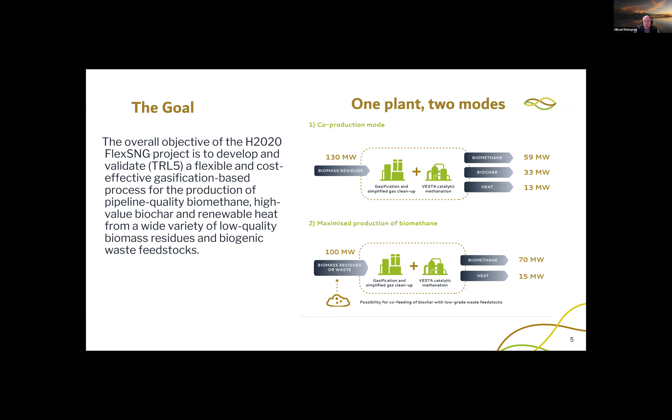There are 9 different work packages in the FlexSNG, and in other webinars they've been talking about other work packages. Today we will focus mainly on work package 2, which is optimization of the feedstock supply chain, and also on work package 8, the case studies and environmental analysis and business potential. And of course work package 9, which is part of this webinar for dissemination and communication.

There are a number of case studies, divided into 4 different regions. Today we're going to focus more on the Canadian one, but there are also European ones: North European, South European, and Middle European, with a number of case studies. Each of those cases has different characteristics used to validate the process.

In the project we have set some very tough goals or challenges. For the optimization of feedstock, we would like to see a decrease of cost of 20%. For the conversion process CAPEX, we want to see a reduction of 30%. And for the overall biomethane production cost, we are looking at a reduction of 30%. So these are the challenges we put ourselves for in the project.

Today's seminar we'll talk about advanced analytics - the scientific process of transforming data into insights for the purpose of making better decisions. This is a collection of different data techniques, and you will see optimization, machine learning, multi-criteria decision-making models. All these are used to improve decision-making for the businesses.

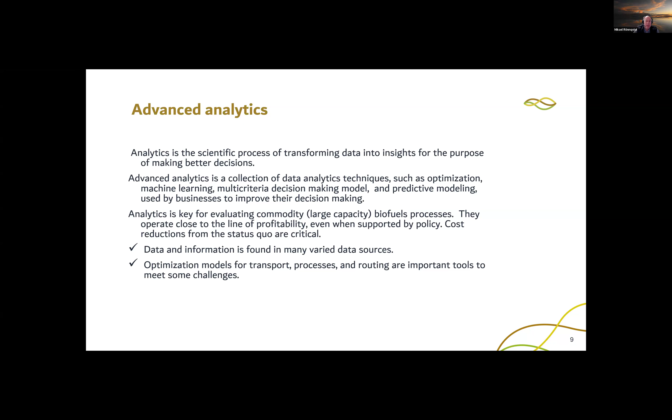Data and information comes from many different sources - you can think about big data. We're going to see some of the optimization models for transport and processes. These are important tools to meet the challenges I just mentioned.

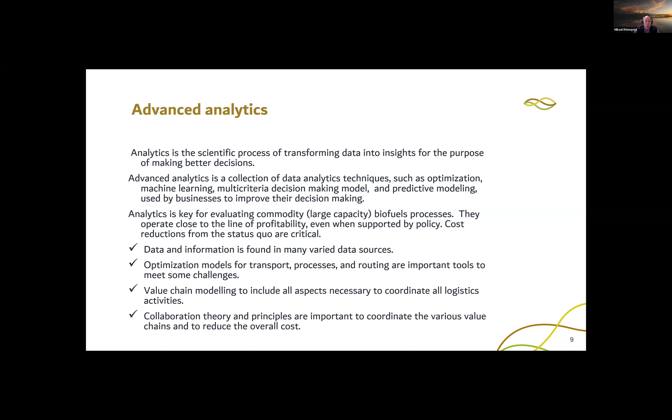We look at the value chain to coordinate the logistics activities in each chain. And because we are looking at multiple resources, we're also looking at collaboration between value chains. That's another type of challenge - we have to coordinate these chains so we can use them where they are the best fit.

The Canadian team, like I said, has 5 projects. There are 3 from Polytechnique Montréal, which are more on the chemical side, and 2 projects from Université Laval, which are more on the logistics side.

So what we're going to do in the presentation here is really look at the Canadian case study and look at this as a high capacity biofuel production process.

What we're going to look at in this seminar are the issues of high biomass feedstock costs - even if we have large volumes from advanced harvesting processes - the feedstock flexibility and delivery optimization. The process technology is capital intensive, so reductions are critical, and small differences in yields or processes available can significantly change the cash flows of the process which is running. Also, the manner in which the process integrates with adjacent processing facilities via industrial symbiosis is critical.

So in this seminar we will hear a number of these projects. I started with the introduction. Simone will talk about an overview of the FlexSNG study cases. Rozita will turn to talk about more technical planning, the integration of biomass value chains - forestry, agriculture, and MSW. Asudeh will look at more operational route planning for the FlexSNG Biomass-to-Bioenergy project. Yasaman will look at biomass pretreatment trains for the FlexSNG gasification process. Tunet will look at leveraging industrial symbiosis to improve FlexSNG process economics. Then Simone will come back and talk about techno-economic analysis of the FlexSNG process in the study cases. And to finish up, Paul Stewart will run the wrap-up discussions.

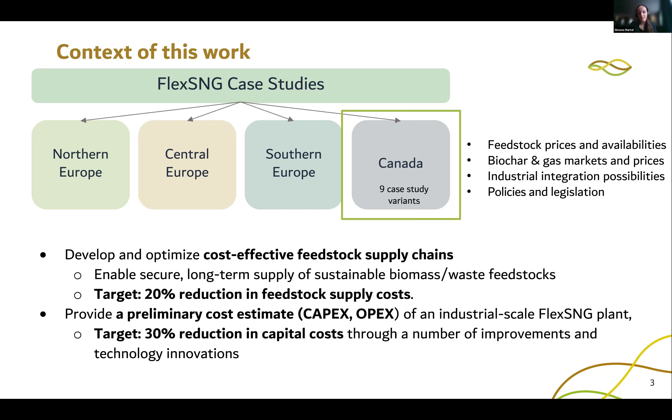Our Canadian case will look at 9 case study variants. So how did we get to the case studies?

First of all, there was some experimental work done on the gasification pilot plant by VTT, a research center in Finland. This allowed us to close some mass and energy balances that were afterwards modelized to generate simulations for the case studies. With these results, capital and operating cost estimates were gathered from industrial partners, which led to technico-economic analysis of the case studies.

In this Canadian case study, Université Laval is looking at feedstock logistics and costs, and Polytechnique Montréal is looking at pretreatment, industrial symbiosis, and TEA, technico-economic analysis.

So now, our Canadian industrial partner is Greenfield Global. They are based in Varennes, Quebec, and they have been operating since 2007. For those who are familiar with Quebec, it is near Montreal.

You can see here behind Greenfield Global, the St. Lawrence River. Greenfield Global produces the lowest carbon ethanol in Canada, up to 190 million liters per year, and they have big expansion plans for the Zero Fossil Horizon 2030.

They are having a 60 megawatt electrolyzer installed next fall, for their methanol production projects. They're also having an expansion for their ethanol distillery.

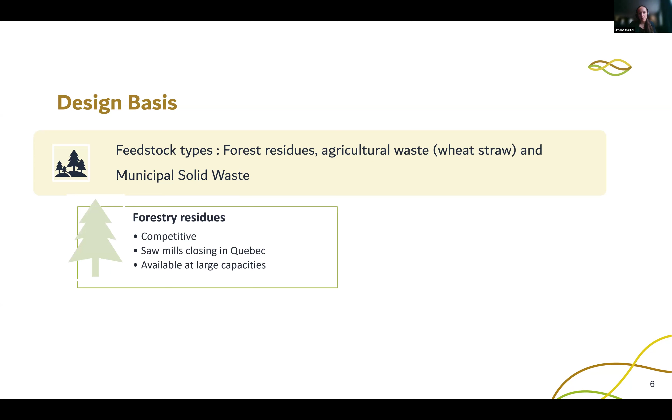Forest residues are a competitive feedstock here in Quebec. Sawmills are closing, so they're available at large capacities. Wheat straw is interesting because there are some existing value chains and brokers, and they're available at close range as Greenfield Global is near some agricultural zonage.

Municipal solid waste is also available closely, as we are near some big urban centers. However, there is a complexity of triage for this feedstock to get to solid derived fuel, which is to be put in the gasifier. There is also a risk with this feedstock because there is a neighboring plant in construction that is seeking to use this feedstock.

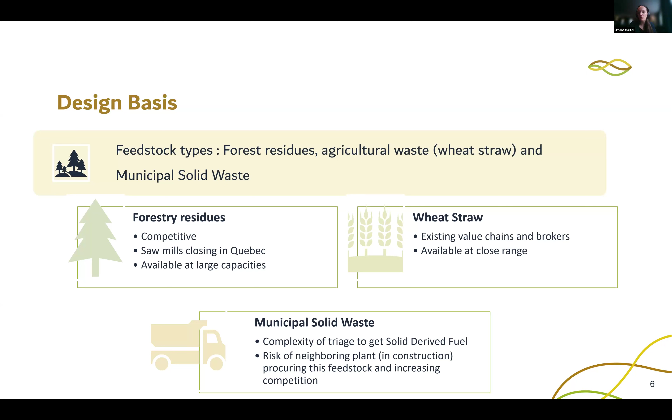We will look at capacities ranging from 500 bone dry tons a day up to 3,000 bone dry tons a day in our case studies. In megawatts, this is from 100 to 600 megawatts on the feedstock basis.

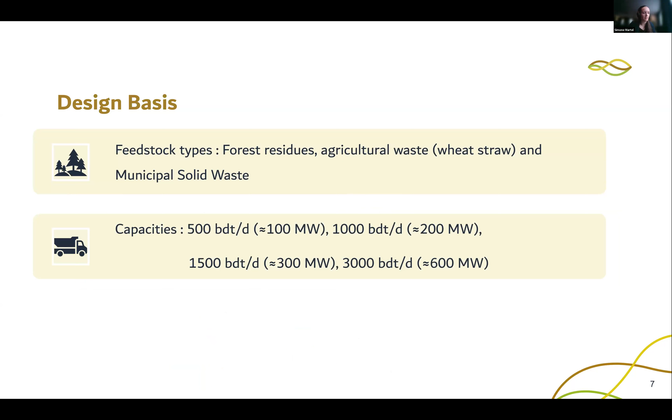So for our case studies, we took the one plant, two modes configurations. The first mode, as explained by Mikael, produces biomethane, biochar, and heat. The second mode maximizes production of biomethane, and this second mode is the one that's more applicable to our cases because of the competitiveness of the price of biomethane relative to biochar in our context.

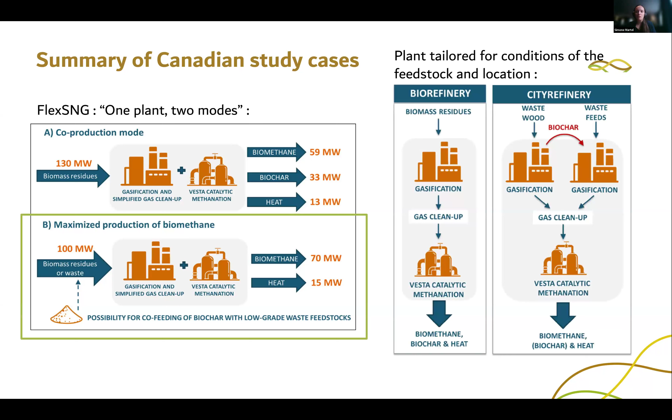The FlexSNG plant is also tailored for conditions regarding feedstock and location. In our cases, the best configuration in most cases is the biorefinery, 1 single line of gasification. However, we will also look at 1 case with the city refinery configuration, so dual gasification lines, for more challenging waste feedstocks.

Here are our 9 case studies from the Canadian context. We have 5 forest residue cases ranging from 500 bone dry tons a day up to 3,000 bone dry tons a day.

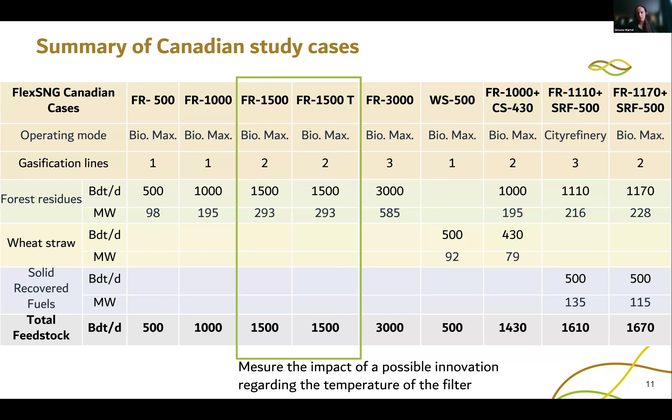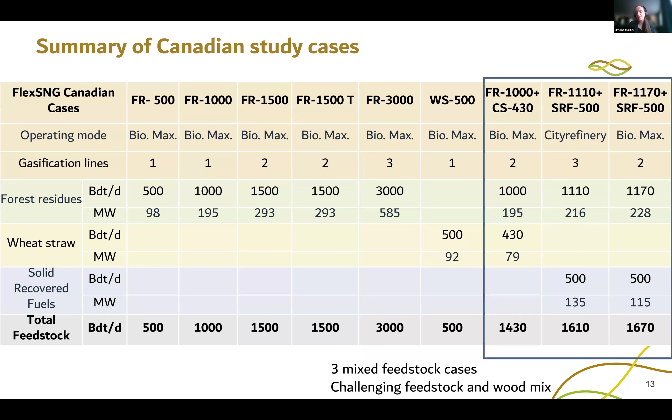We have 2 cases on the same feedstock basis, however there is an impact regarding a possible innovation on temperature looked at in the second case. There is a wheat straw case to solely look at this low cost agricultural feedstock. And we have 3 mixed feedstock cases that look at mixing more challenging feedstocks with wood. We also have our city refinery case.

So what are the key questions that will be answered in this webinar? First, how can collaboration across forestry, agricultural, and MSW value chains improve biomass to bioenergy logistics and lower feedstock costs? After, we will look at the benefits and challenges of optimizing feedstock logistics through truck steering strategies in daily operation and route planning. We will also see the estimated cost and technical considerations for various pretreatment trains, including the potential for heat integration in the gasification process.

We will look at the practical solutions that can enhance economic and operational benefits of the FlexSNG process through industrial symbiosis and strategic collaborations. And we will finish by answering the key results of the technico-economic analysis of the implementation of FlexSNG case studies in the Canadian context. Thank you very much.

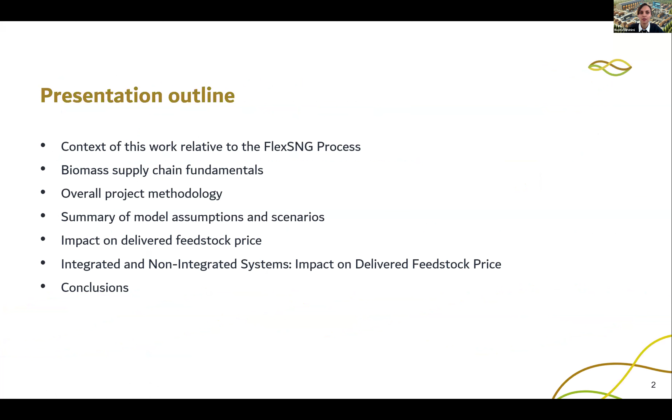Today I'm going to talk about the tactical logistic optimization for the FlexSNG Biomass-to-Bioenergy Project. Here you can see the presentation outline, and I'm going to talk about these contents in order. Let's start with the first line, which is the context of this work relative to the FlexSNG process.

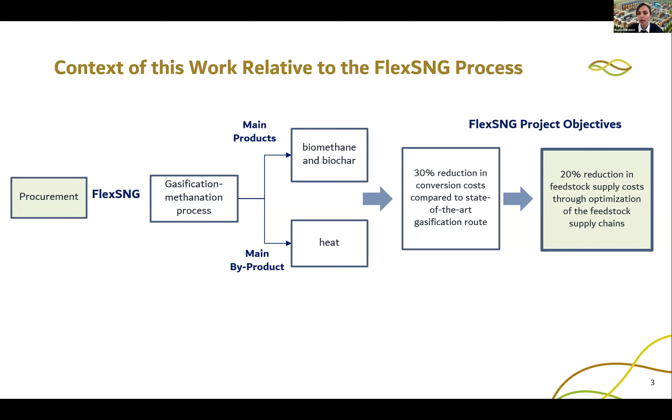You already got familiar with the FlexSNG. It's a new gasification-methanation process to produce biomethane and biochar with the aim of 30% reduction in the conversion cost. But this work, the procurement part of the FlexSNG, has the aim of 20% reduction in the feedstock supply cost. This work is going to provide the raw material for the gasification process, which is the biomass.

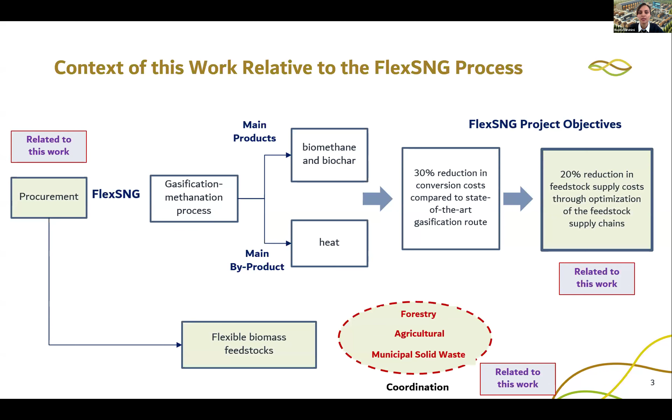This biomass comes from different value chains, different sources, like the forestry value chain, agricultural value chain, or municipal solid waste, MSW value chain. The overall objective is making a collaboration between 3 different biomass value chains by exploring the differences and similarities of the logistic operations between them.

We know there are factors, some uncertainties, that affect the logistic operations and the value chains, like seasonality, time of harvesting, quality and quantity of the biomass. By knowing them, we are going to have a tactical or annual planning.

So when we talk about the logistic operations, I would rather talk about the locations first. The beginning places or supply zones in the forestry biomass value chain are the harvesting areas where we cut the trees and pick up fuel logs and residues there as the biomass.

In the agricultural biomass value chain, we consider farms as the beginning point and pick up wheat straw, for example, as the biomass there. In the MSW, we have eco centers as the beginning points. There are different categories for the municipal solid waste, and we pick up only the woody MSW for this project.

So the first logistic operation here is harvesting and collection. After that, we have intermediate facility locations or terminals, and at the end of the line we have biorefinery yards. We can only do some logistic operations there because of the limited space that we have.

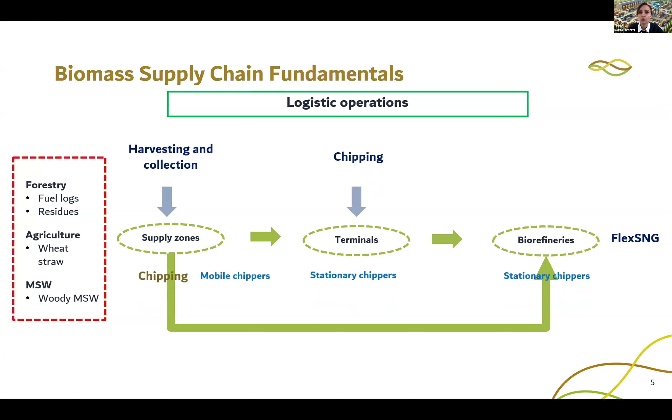Chipping is the other logistic operation. It is really important because we need a smaller size of biomass to tackle the bulkiness. It helps us to reduce the transportation cost.

And after that we can mention drying. Drying is important because we need to control the moisture content of the biomass, which matters for the gasification process. We can do the chipping and drying in different places with different machines and different costs.

We can mention transportation. You know that transportation is the most important logistic operation with the highest share of total cost. We can consider trucks, trains, or other transportation modes.

Storage is also important. In the tactical planning, we need to have a continuous flow of material during a year, so we need to cover the possible shortage of one period with the volume of the other period. Storage helps us to tackle those uncertainties.

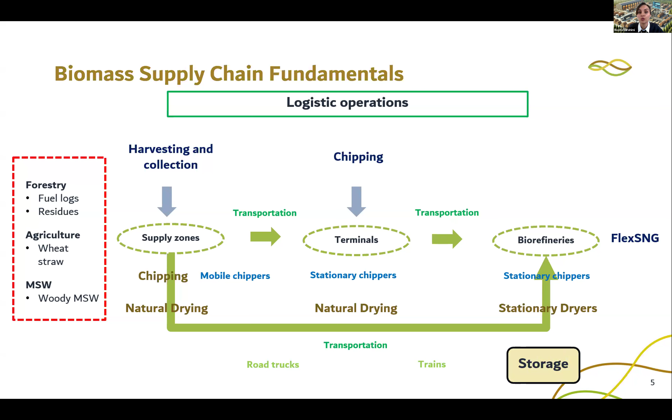And finally, we have conversion. To talk about gathering data for the Canadian case study, it's a biorefinery placed in the Varennes area. I use different websites like Forêt Ouverte for forestry biomass value chain, Biomat for agricultural biomass value chain, and Recyc-Québec for municipal solid waste value chain. They are governmental websites providing geographical information. I extract the required information using tools like GIS tools and Python, and create a larger scale database for this project.

To talk about the collaboration mechanism, I would like to provide an example. Here you can see the assumptions of this example. There are 3 sources of biomass.

There are actually 2 transportation modes here. The first one, truck system. The second one, train and truck together.

Considering terminals as an option, we are going to know how having terminals affects the optimization results. Finally, for the demand, I consider only one production plan, because there are different production plans for the FlexSNG, and I pick up only one of them as the demand of this example.

There are some logistic options in this example. Option 1: we don't have terminals in the system and chipping occurs at the roadside and at the biorefinery. Option 2: again, we don't have terminals, but chipping occurs only at the roadside.

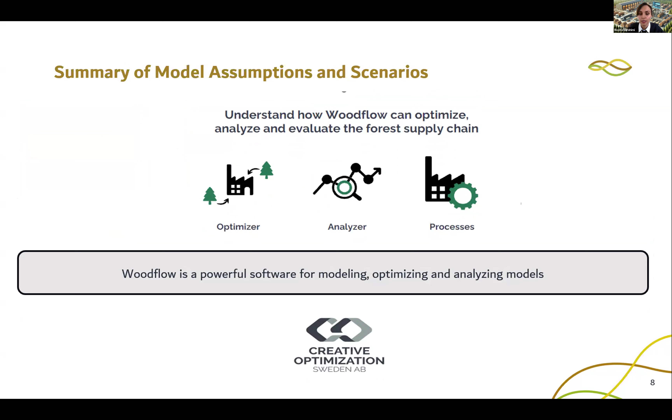To solve and analyze the optimization system, I use Woodflow. Woodflow software is a powerful tool from one of the FlexSNG partners, a creative optimization company, a Swedish company. So I use Woodflow to do the optimization.

Let's go through the collaboration mechanism as an example. Just imagine that we have only forestry in the system. It is the base case. What does that mean? It means that 100% of the demand can be satisfied by the forestry.

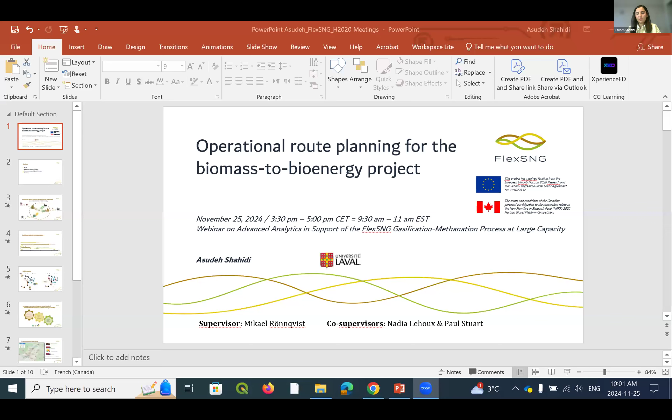Today I'm here to share some insights on operational route planning for the Biomass-to-Bioenergy project. This work supports the FlexSNG gasification-methanation process using advanced analytics and optimized solutions for feedstock supply at the operational level.

First, I will introduce the goals of FlexSNG that we are going to support. Then I will present the methodology and the advanced analytics that we used. Then there is a representative case study and the results, followed by the concluding remarks.

This specific work supports the first goal of FlexSNG, which is to reduce the feedstock supply cost by 20%. As mentioned earlier by our colleagues, the biorefinery in Canada is supplied by 3 sources of feedstock: agriculture waste, municipal solid waste, forest residue, and some byproducts from the forest industry.

Our idea is to integrate the 3 sectors to have better planning at the operational level for the transportation of not only biomass in the 3 sectors, but also other products transported in them, like round wood to the forest industry, other waste to recycling plants, and food crops to the food industry.

So to support our idea of truck sharing at the operational level transportation planning, we use optimization techniques. The tool that we provided has 3 main steps. The first step is to solve 2 optimization models.

We solve 2 optimization models because there are 2 types of links in the network, and these models determine the important links in the network. Transportation of biomass is done in full truckloads, and every time a truck transports a full truckload, it needs to take another trip empty to reach another supply node. So there are both loaded trips and unloaded trips. To determine those links in the network, we solve these 2 optimization models.

Once the network is ready, we use another tool to generate detailed routes for all the possible truck types that we have in the network. Then finally, another optimization model is used to select the optimal route for each individual truck.

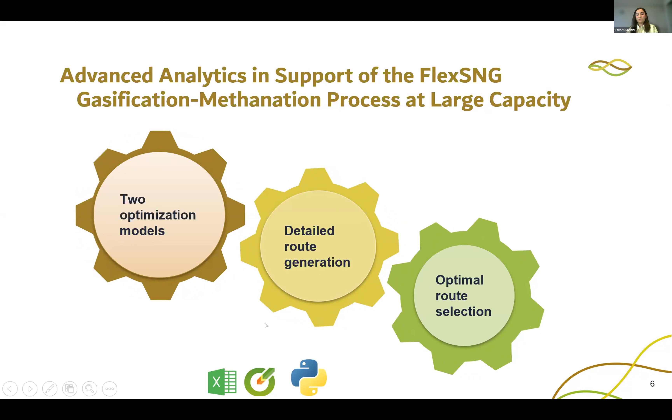This tool is implemented in Python, and we used QGIS and also Excel for the purpose of visualization and data storage. The tool is now ready to be implemented on cases.

Here we propose a representative case study in Canada. You see the biorefinery named GFG in the middle, right outside of Montreal. We assume there are some nodes around this location in the 3 sectors of agriculture, forest, and MSW, or municipal solid waste.

The total volume to be transported in this example is 4,500 tons. About 1,500 of it is biomass transportation, and the rest is for the transportation of other products that we have in the 3 sectors. The reason we consider other products is that for truck sharing, we can find more opportunities for sharing.

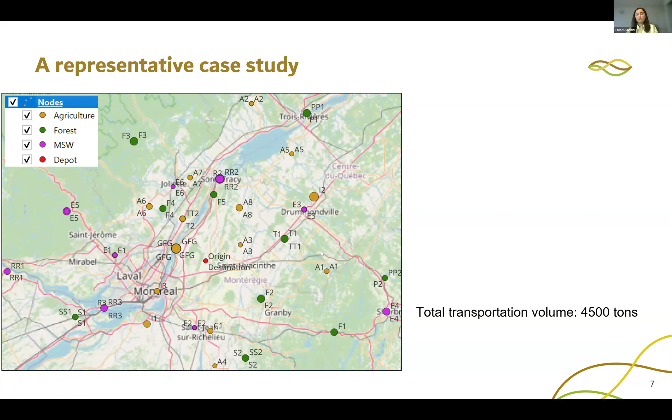The larger the area, the more opportunities for truck sharing, and consequently more reduction in transportation costs. We also assume we have 4 types of trucks: one for round-wood transportation, one for chips transportation, another for solid waste transportation, and also one agricultural truck.

You can see that the first truck has a different configuration, but the rest of the trucks have similar configurations, and they can be shared with the other sectors.

In order to plan this network, in the non-collaborative scenario where the trucks are not shared, we have about 130 full truckloads to be planned in a 1-day planning horizon.

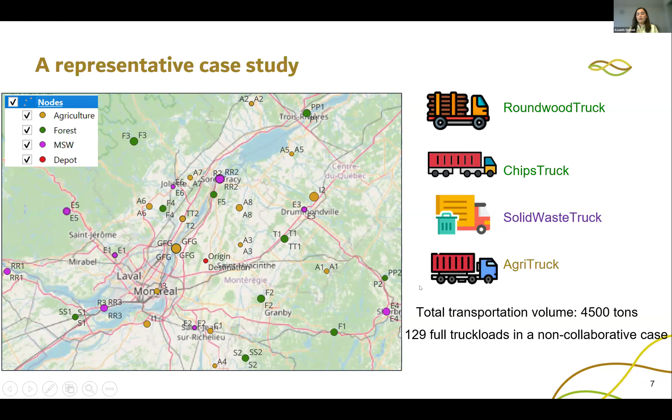We solve this example using the proposed tool. You see the comparison between the collaborative and non-collaborative scenario. As I said, the first truck has a different configuration and is not shared with other sectors, but for the 3 other trucks, you can see that some of them are used more than in the non-collaborative scenario.

For example, the chips truck has better capacity and is used more than before. What is important here is that the total number of trucks is reduced, by 8 trucks in this example. We also made a comparison in terms of working hours of the trucks. The trend is the same, but the reduction in transportation time used by all trucks is reduced by 9%.

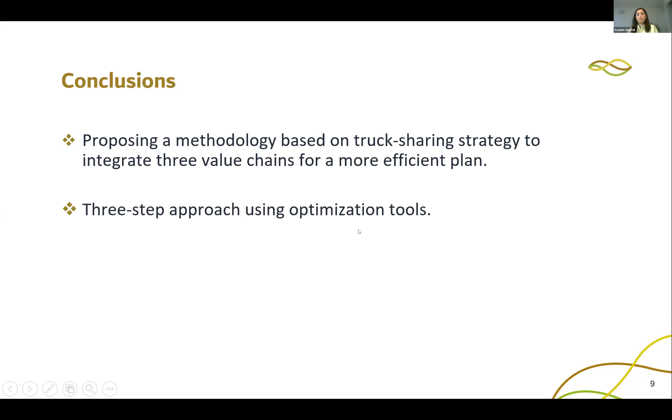Then we used, as I explained, a 3-step approach which uses optimization tools. Optimization tools are very powerful, and have proven to be very powerful in transportation planning. The methodology that we proposed has 2 main benefits. The first benefit is about the methodology itself.

For the vehicle routing problems, in the literature there are many approaches. But if we count only on the classical methods in the literature, we cannot solve even a small problem, because this type of problem is very complicated, and there is a need for creativity to make it appropriate for every specific problem it's implemented on. From that point of view, our methodology is quite efficient to solve a large case of FlexSNG.

The advantages that we gain from the collaboration, comparing it with the non-collaborative counterpart, is a 9% reduction in the transportation time. And as I said, this is beside the saving that we gain from optimization techniques. Totally, what we contribute is more than the 20% reduction, which is the first goal of FlexSNG asked for.

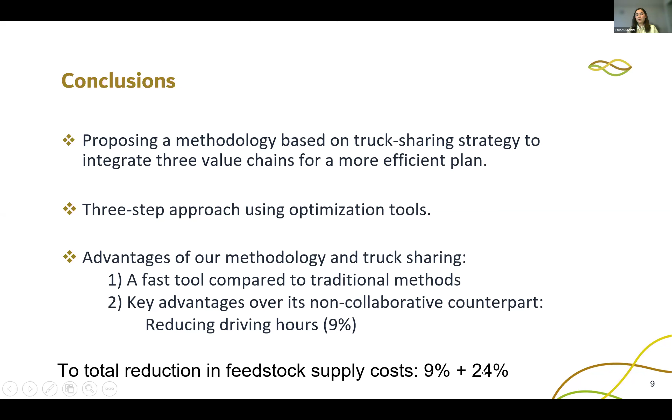This is the 9% reduction that I achieved from the operational point of view, beside the 24% reduction that Rozita gained at the tactical level planning. Thank you for your attention.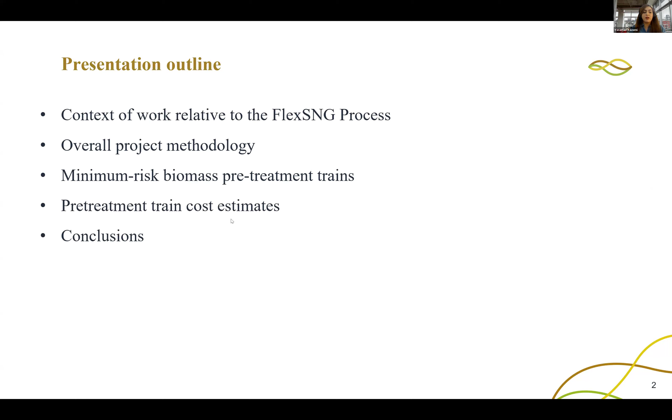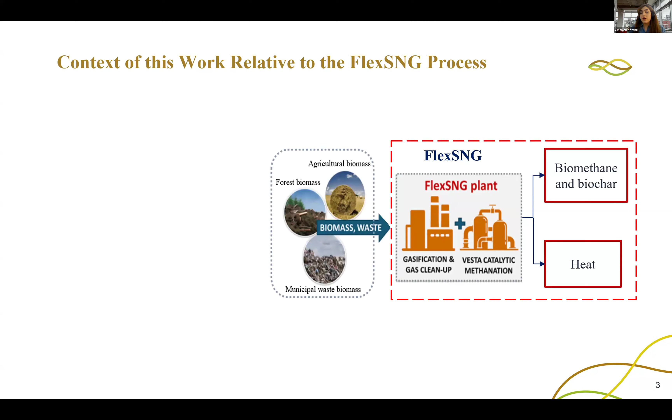As you know, FlexSNG is a biomass-based, gasification-based process for the flexible production of biomethane and biochar heat from agricultural biomass, forest residue, and municipal solid waste. The key goal of FlexSNG is to reduce the biomass supply chain cost by 20%, which is related to my work.

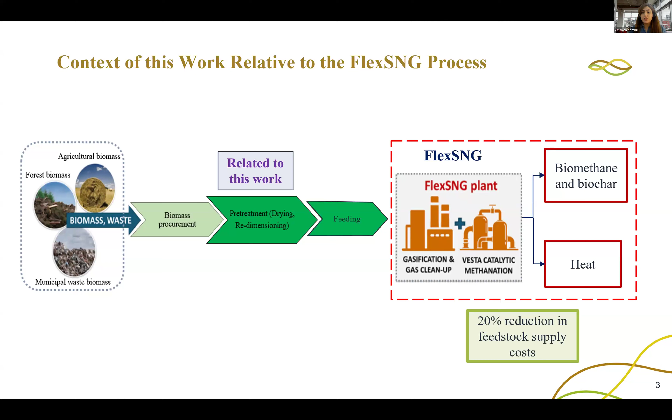Pretreatment is a critical component of the biomass supply chain, and it can reduce the supply chain cost by optimizing the pretreatment train and finding suitable pretreatment trains. We can also impact the downstream processes. So the objective of my project is to develop a systematic framework to identify candidate pretreatment trains for the FlexSNG gasification process.

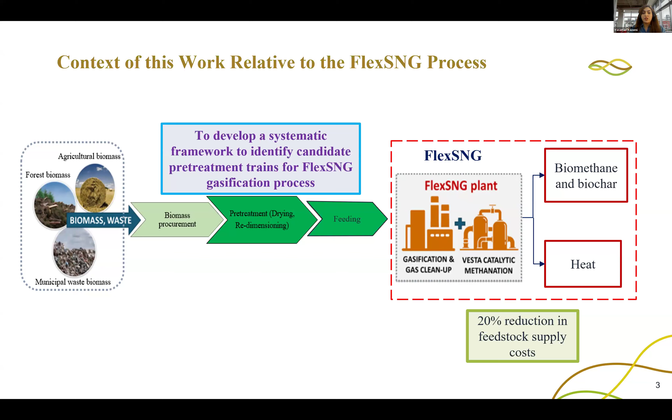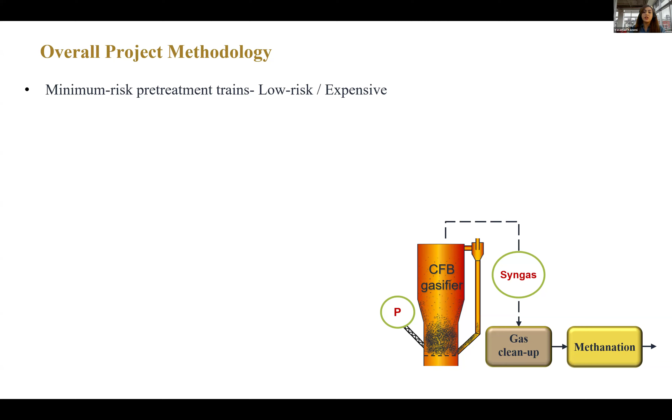Different pretreatments are devised for different feedstocks, so basically different pretreatment trains are required if you are using different feedstock. In order to find the candidate pretreatment trains, I will start by looking at minimum risk pretreatment trains, which are operational at industrial scale and have low risk, but are usually expensive.

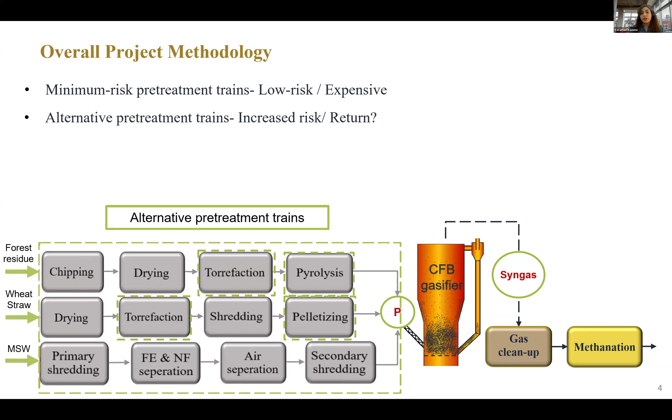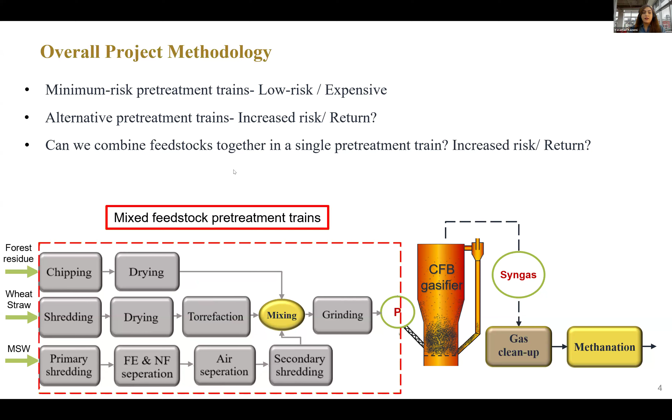Then I look at alternative pretreatment options, defined by considering variants on technology units like different dryings, or variants on the overall pretreatment train, like using torrefaction or pyrolysis, which again increase the risk but have potential for return. Finally, I will look at possible pretreatment trains which can handle a mixture of feedstocks, which again increases the risk but has potential cost saving.

So the trade-off between the different pretreatment trains will be evaluated - the trade-off between risk and return - to find the candidate pretreatment train. However, today the focus is on minimum risk pretreatment trains for the target feedstock.

In order to find the minimum risk pretreatment trains, we first conducted a global survey of commercial scale biomass pretreatment plants, either gasification or pyrolysis plants, to understand existing pretreatment solutions for the target feedstock. Then we triage the number of options to ensure they meet the feedstock specification required by the FlexSNG gasification, and then we devised minimum risk pretreatment trains for the target feedstock.

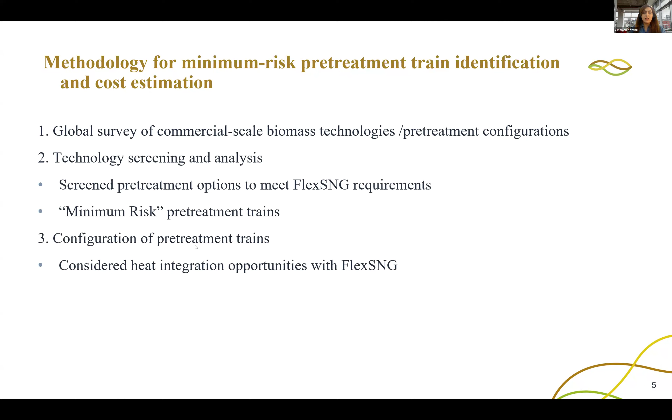We considered heat integration in our design. Then we obtained capital cost quotes from the most leading suppliers of the pretreatment technologies, and approximated the capital cost for the Canadian case studies.

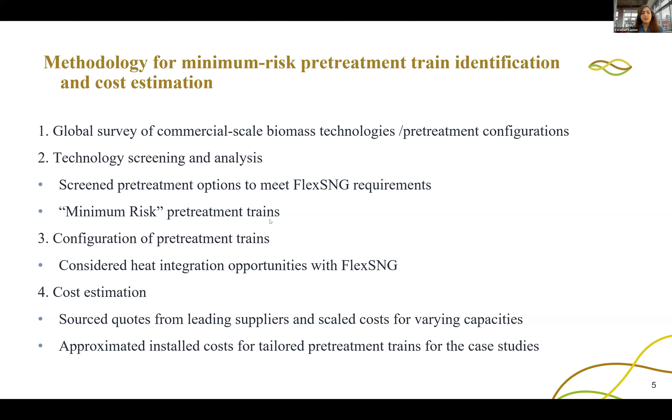As you know, that's what we found from our survey. For forest residues, usually a mobile chipper is used, followed by a belt dryer.

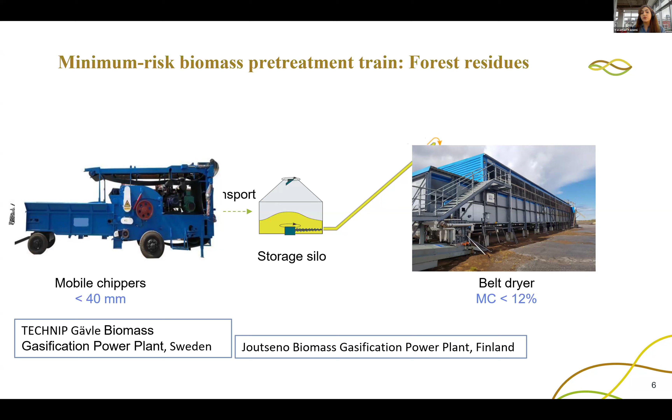There are some examples of gasification power plants like Technip and Joutseno which use belt dryers, but rotary dryers are also used, like in Güssing biomass gasification plant.

And this is the same for wheat straw, but instead of a mobile chipper, a two-step shredder is used.

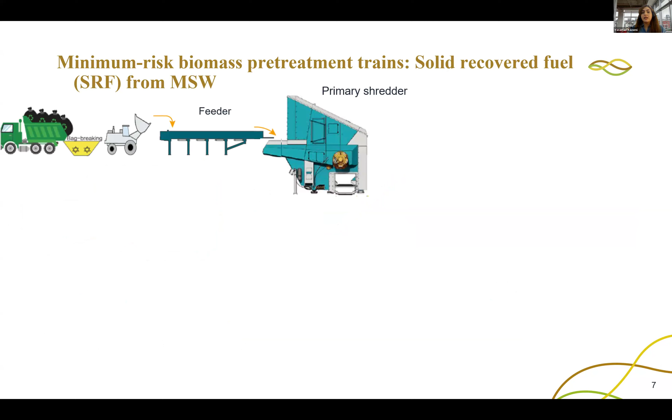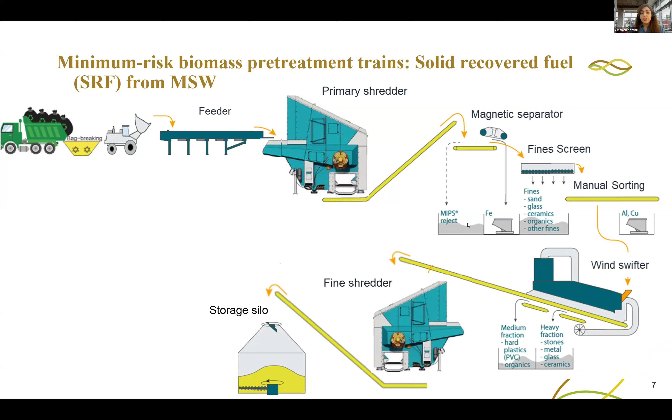But for municipal solid waste, it's much more complex, as it has to be converted to solid recovered fuel, or SRF. After initial shredding of municipal waste, ferrous and non-ferrous metals are usually separated using a magnetic separator and eddy current or manual separation. A fine screen is also used to screen out non-combustibles, followed by a wind sifter which removes heavy fraction, and then a fine shredder and a dryer.

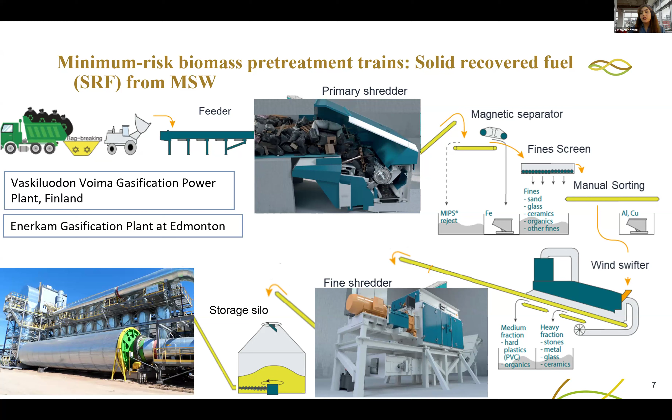There are some examples of gasification power plants which use a belt dryer, like Vaskiluodon Voima gasification and Enerkam, but rotary dryers and fluidized bed dryers are also used at industrial scale.

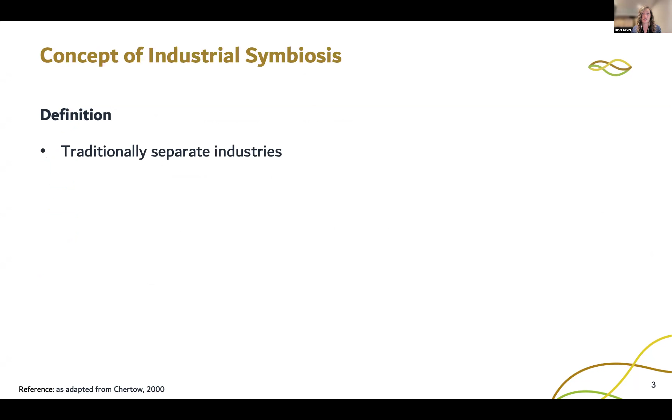So the concept of industrial symbiosis derives from the classical definition as proposed by Chertow, where the focus is on traditionally separate industries that can improve their competitive advantage by having a physical exchange of material, energy, water, and byproducts. This exchange takes advantage of the collaboration and synergies made possible due to the geographical proximity of these industries.

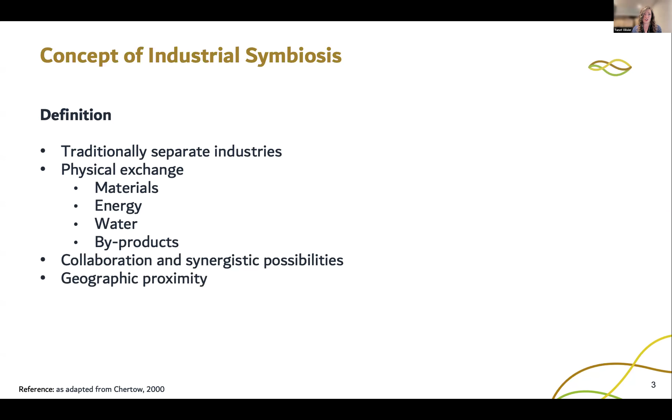One of the most classical examples in literature of this is that of Kalundborg, located in Denmark.

So, in the context of this FlexSNG project, where we have these specific goals which we are looking to attain, the question is then, is it possible that a potential for industrial symbiosis exists with the current waste streams and possible co-production available to FlexSNG?

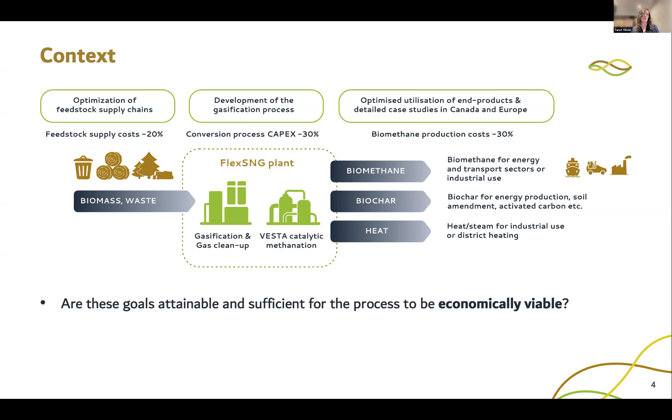But it is not clear which combinations of symbiosis could bring the process to economic viability. So with this, we are asking: are these goals attainable and sufficient for the process to be economically viable? Can incorporating industrial symbiosis improve the process? And how much value will industrial symbiosis add?

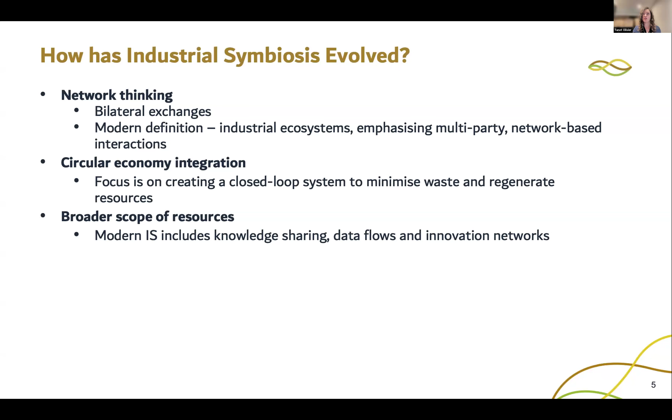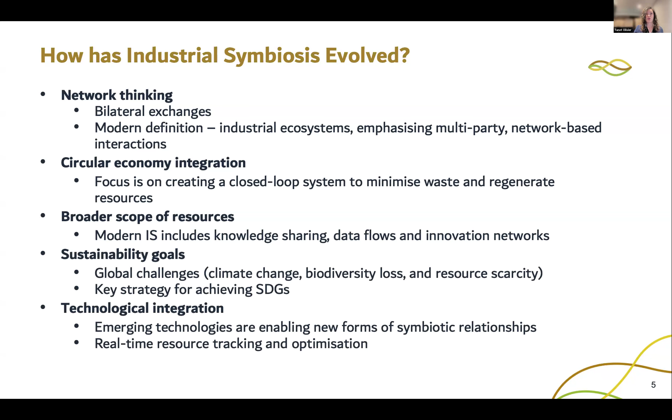Next, let's look at how industrial symbiosis has evolved over the years, and how this evolution has now incorporated network thinking, circular economy integration, and a broader scope of resources. So we're not just looking at physical materials, we're also looking at data exchange. The focus has shifted more towards sustainability goals and incorporating those goals, and finally, new technology integrations have made it possible for us to improve optimization and real-time tracking of resources.

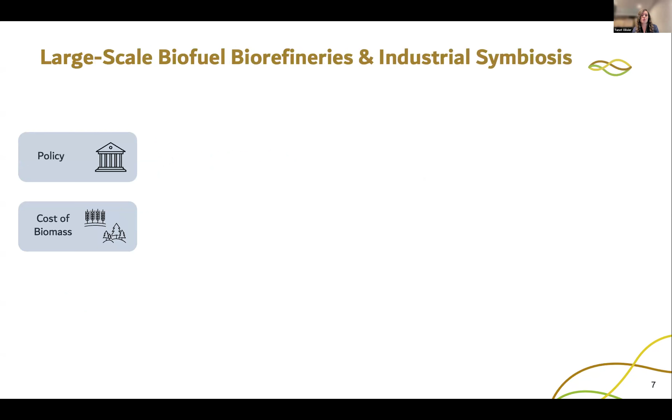So let's say we have the policies in place that favor biofuel production, various sources of cheap biomass, and we can achieve the necessary economies of scale required to produce biofuels at a competitive price. We have a large-scale biorefinery that incorporates FlexSNG, but why is this still not sufficient for us to compete with commercial scale fuels? Can we bridge this gap by incorporating industrial symbiosis into the network? How do we quantitatively assess the impact of industrial symbiosis?

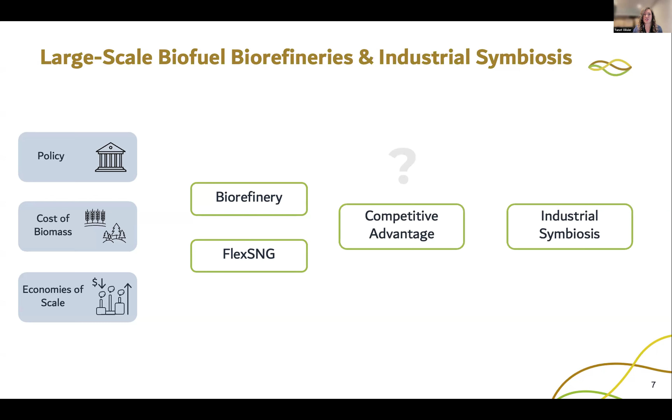To tackle the complexity of large-scale biofuel production, a systematic design framework is essential. This framework enables coordinated management of resources, waste streams, and partnerships, addressing practical challenges such as fluctuating biomass availability, high energy demands, and the needs for economic feasibility.

Biofuel refineries also produce multiple product streams such as biofuels, biochemicals, and bioenergy. The design framework incorporates these streams with other industry processes to maximize value creation while aligning operations with market demand and environmental goals. Central to the framework is the value chain, which ensures efficiency by identifying synergies at every stage from raw material supply to production distribution.

By focusing on the value chain, we can reduce waste, improve sustainability, and enhance the economic viability of biofuel production. Ultimately, the design framework lays the foundation for incorporating industrial symbiosis. With this framework in place, we can identify and leverage synergies between industries, ensuring that biofuel refineries operate not just as standalone facilities, but as integrated players in a broader, more sustainable industrial ecosystem.

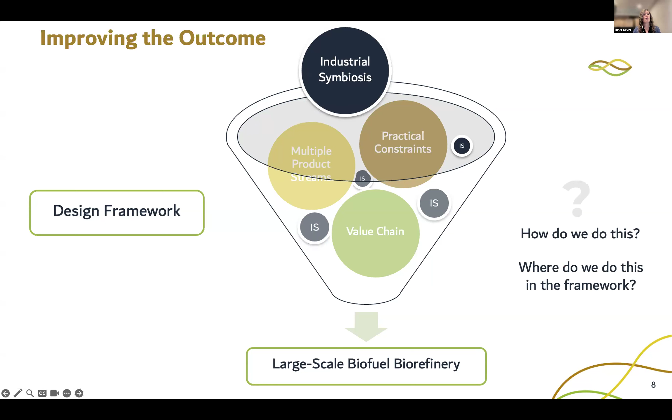But how do we do this? And where do we do this in the framework? So let's look at how this design framework will be developed.

First off, we can look at defining the scope and resources, where the outlines are available inputs such as the biomass types and the carbon dioxide and energy. We will then identify stakeholders and key partners within the network, configure the symbiosis network by mapping out the potential synergies using the tool chosen, evaluate scenarios and simulate outcomes for each configuration, and then optimize and validate by refining and validating the framework and applying this to other case studies. This is where advanced analytics would come into play.

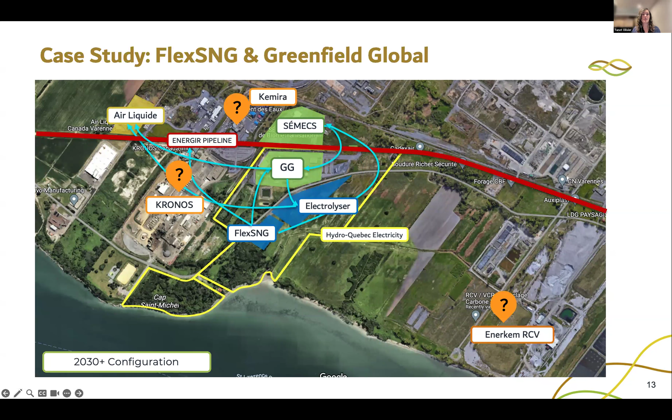So next, if we look at what are the additional scenarios that can take place in 2030 plus, we have where we can look at potential partners such as Enerkem, Kronos, as well as Kemira for additional exchange of materials. So how are we going to evaluate this?

By looking at carbon, hydrogen, oxygen symbiosis network, which is like a matchmaking tool. It helps companies figure out how to share resources more efficiently by analyzing how carbon, hydrogen, and oxygen, which are the building blocks of many materials and energy systems, move through different processes in order to produce final products.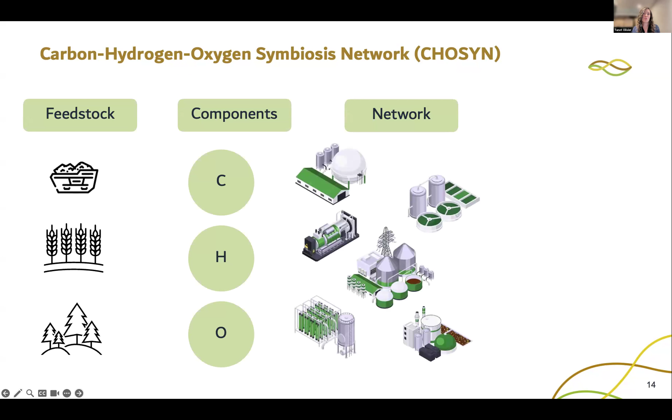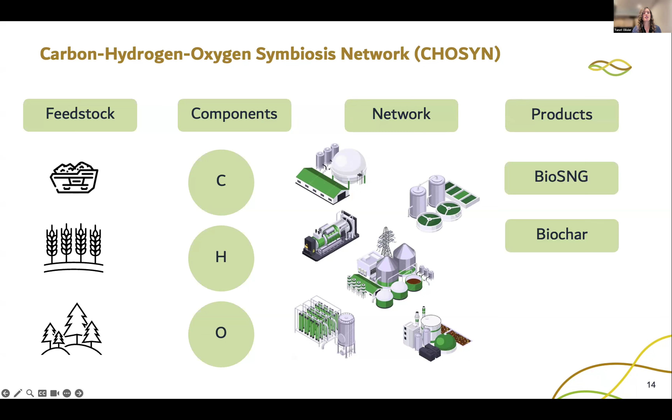So here we have our feedstock, which gets broken down into the components of carbon, hydrogen, and oxygen. We have an available network of different industries that can process these components. And then finally, we can look at what are the products that we can produce, such as bioSNG, biochar, energy or heat, as well as other products.

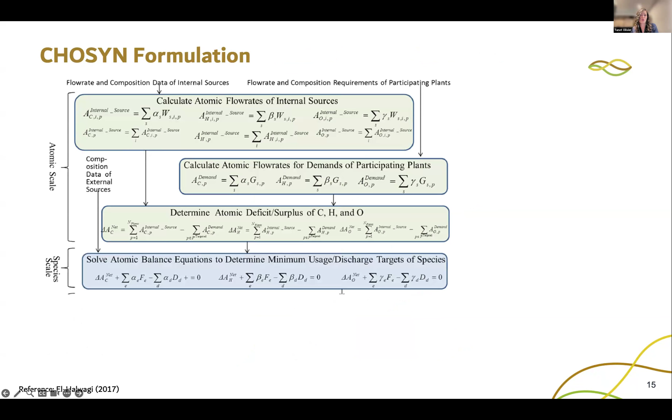So the general design methodology and formulation for CHOSYN looks at evaluating the available inputs at an atomic level. It identifies the different products that can be produced within the available network, and then further on, evaluate the various network configurations and optimize these for specific objectives, such as maximum feed profitability.

So with this, when we're looking at the different sort of steps in this, and how the desired objectives and potential networks can vary. If we look, for instance, a similar network with the same configuration, it might differ if we're maximizing for profit versus if we're minimizing for waste.

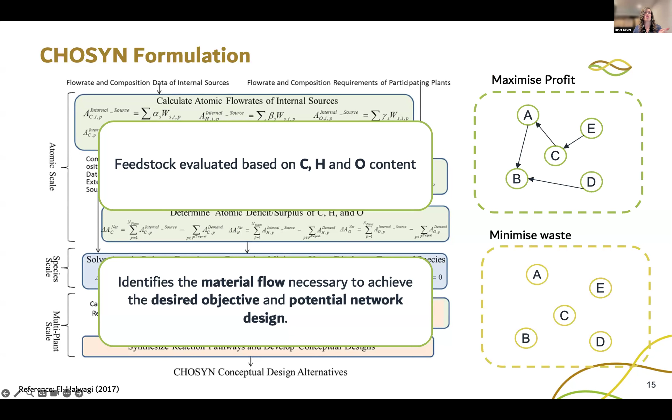Lastly, the challenges to determine whether integrating industrial symbiosis and technologies like FlexSNG at Greenfield, how can we overcome these with the barriers faced when producing large-scale biorefineries?

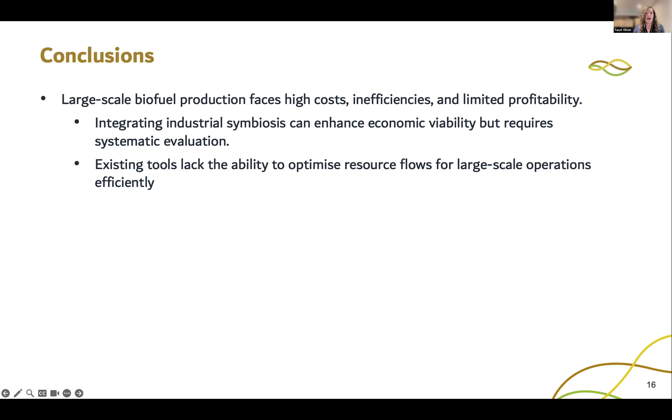CHOSYN can be employed to track the flow of resources like carbon dioxide and biochar between industries, identifying the optimal exchange that maximizes value and minimizes waste. CHOSYN can also be tailored to model large-scale operations, including high biomass throughput and multiple outputs, such as biochar and bioSNG, which are unique to the FlexSNG process.

Integrating industrial symbiosis into FlexSNG operations at Greenfield Global could lower CapEx by 30% while increasing profitability by leveraging synergies like heat sharing and biochar monetization. By adopting these strategies, Greenfield Global can position itself as a leader in sustainable biofuel production and industrial innovations.

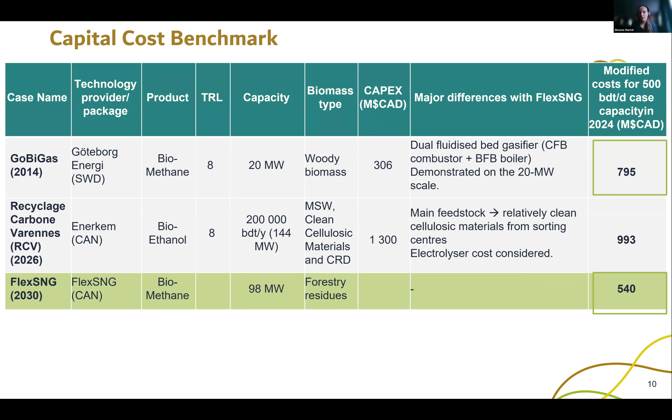So for comparison purposes with our case, we chose to compare mainly to the GoBiGas project because of the same end-of-the-line product and the most similarities. So when comparing these two costs, we get a 32% capital cost reduction. We went to look further into the cost of GoBiGas to compare them to FlexSNG, and we detailed the process sections where the costs were associated.

However, we can see that it is not clearly linear because of the way that we did our estimates.

GoBiGas regrouped all the other project costs in one big category at the end of the column, as we used the other project costs and dispersed them in the two other columns. So we decided to focus more on the differences that would really justify this cost reduction.

First of all, GoBiGas has a significantly smaller scale. It was developed at 20 megawatts.

We're seeking more in the 100 megawatts in this base case. This means less opportunities for synergies in the process or less scale-up optimizations.

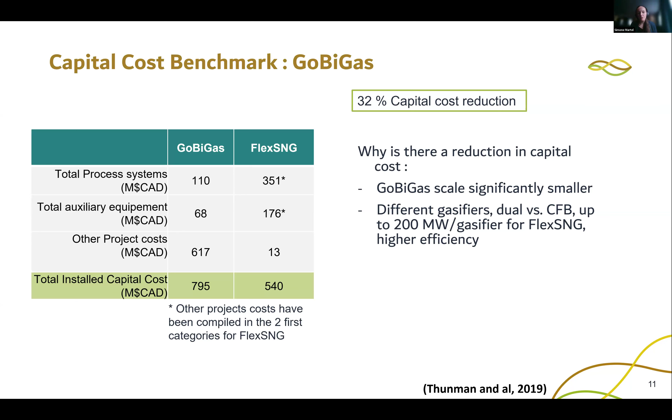Also, there are two different gasifiers that are used. GoBiGas uses a dual gasifier versus a CFB in Flex. The gasifier in Flex can be scaled up to 200 megawatts, which is significantly higher and higher efficiency.

There is also different backend technologies in both of the projects. However, FlexSNG incorporates some innovations and simplified process steps, which all justify this capital cost reduction from GoBiGas.

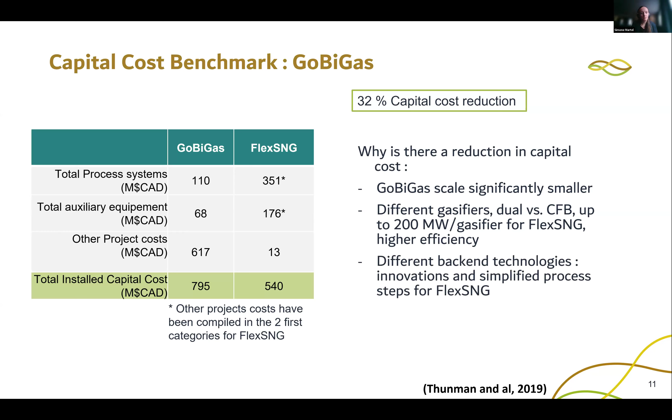So now that our capital costs were benchmarked, let's move on to the operation costs.

So the main assumptions here, looking at the feedstock costs that were provided from Université Laval, you can see the dollars per ton that were assumed.

The agriculture waste and MSW are less expensive per ton than the forestry residues, and for forestry residues, the cost goes up as the capacity and distance goes up.

We also have some cheap power costs here in Quebec. We are lucky to have some available hydroelectricity. So these were the main assumptions used for the OPEX.

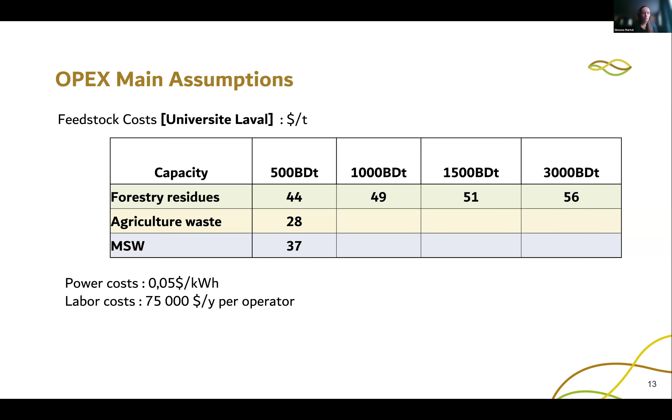For our main revenue streams, we have 4 streams. Starting with the biochar stream, a market price of $150 per ton was assumed because of the high fixed carbon biochar that is generated from the gasification process. This price is assumed to be dispatched by char brokers.

Also, our main revenue stream, bioSNG, has a $30 to $35 per gigajoule value here in Quebec.

This is from contracts that are currently being negotiated with Énergir, the main gas provider in Quebec, which has targets to get more renewables in their pipeline. So this is why the cost is so much higher than non-renewable SNG.

Well, non-renewable natural gas. Afterwards, we have the 125 psi saturated steam stream, which is generated from the low-grade energy that is issued from the FlexSNG process. This would be integrated in Greenfield Global's distillery.

However, we do have an inconvenience in Quebec, which is that we have no other outlet for the low-grade process heat. We do not have district heating.

We have one last revenue stream, which is the CO2 stream. This stream is of high purity CO2. However, we do not have current possible valorization with the neighboring plants.

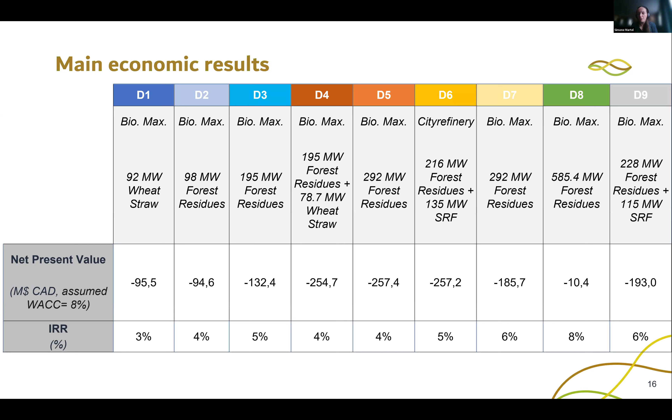I will now show you the net present value we get with a WACC assumed of 8%, and IRRs. As you can see, we generate negative net present values. However, we do have some interesting IRRs that start to appear in the higher capacity cases.

As you can see, if we put next to next the OPEX, revenues, and total capital installed cost, we generate higher revenues than OPEX with a small margin.

The revenue is mostly due to the SNG revenue, and the small margin compared to the high total capital installed cost shows that we generate smaller revenues.

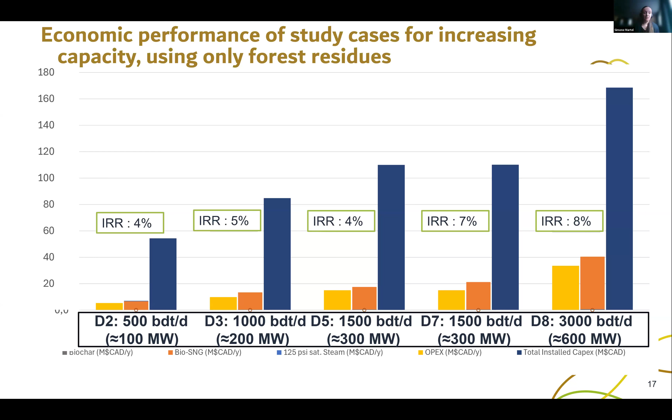So finally, a quick critical analysis of these results. The cases with high capacities perform the best. They do have a high capital cost, but their high revenue, mainly due to SNG, makes them perform better.

The cases with mixed feedstock did give a reduction in feedstock costs with cheaper feedstock than forest residues, such as agriculture waste and MSW. The better performance was associated with municipal solid waste relative to agriculture waste.

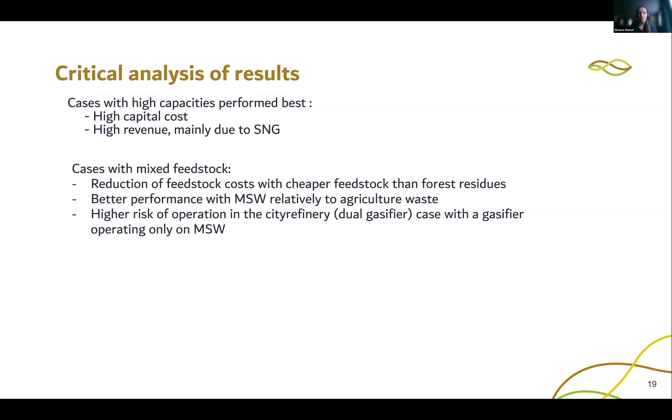However, there is a higher risk of operation with these waste feedstocks, especially in the city refinery case, where there is a gasifier operating solely on MSW.

Canadian cases are unfortunately disadvantaged compared to European cases because there is no access to district heating revenues.

So in conclusion, TEA was performed to answer the big goal: can capital costs be reduced by 30%? Our methodology included gathering capital costs for the process sections and compiling operational costs and revenues from mass and energy balances.

And the scaling factors that were used were adapted for large capacity biofuel processes.